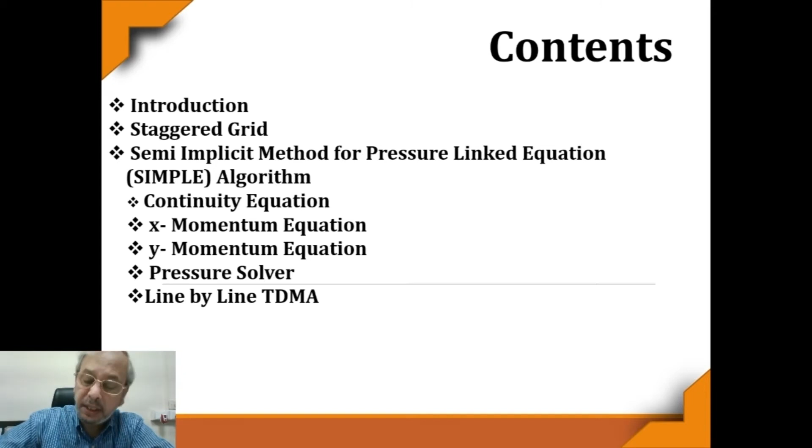Now, equations for incompressible three-dimensional flows are basically continuity equation and momentum equations. In the momentum equations, you can see we have written 1 by Re instead of nu, coefficient of viscosity. That means we have non-dimensionalized the equations. All the velocities and pressure are non-dimensionalized, and instead of nu, we get 1 by Reynolds number together with the viscous terms.

I will mention one feature that is common with both MAC and SIMPLE algorithms. Both the algorithms use staggered grid. Now, what is a staggered grid? Let me start with the basic definition of grid topology. A domain is divided into a number of cells. We can call them control volumes.

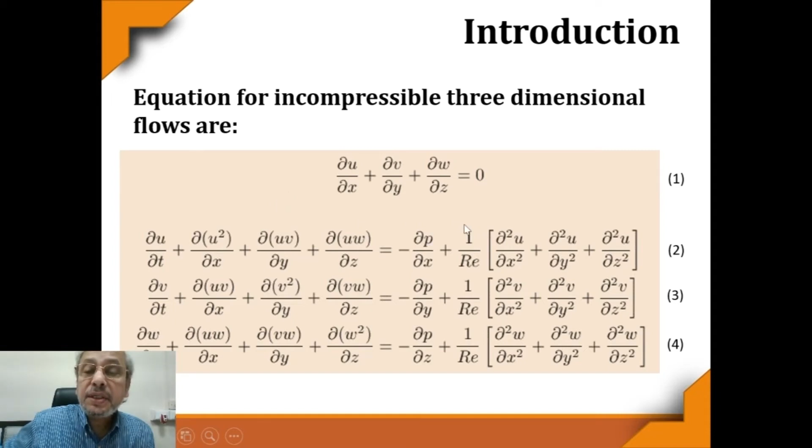In the case of compressible flow, we get an obvious expression for pressure that comes from the equation of state. But here, that obvious expression for pressure is absent. Instead, we have pressure gradients. So, we require to establish some relationship between the pressure gradient and the velocity.

As I said, if this is u(i,j) and this is p(i,j), then this point is p(i+1,j). Now, there is a pressure gradient between these 2 points, p(i+1,j) and p(i,j). This pressure gradient is directly responsible for this velocity u(i,j).

Similarly, in the y direction, if this pressure is pij, this pressure is pij plus 1. So there is a gradient between pij plus 1 and pij. And this gradient dp/dy is responsible for, or linked to, Vij. So pressure gradients in the respective directions are linked to the interfacial velocities. This gives a quicker convergence.

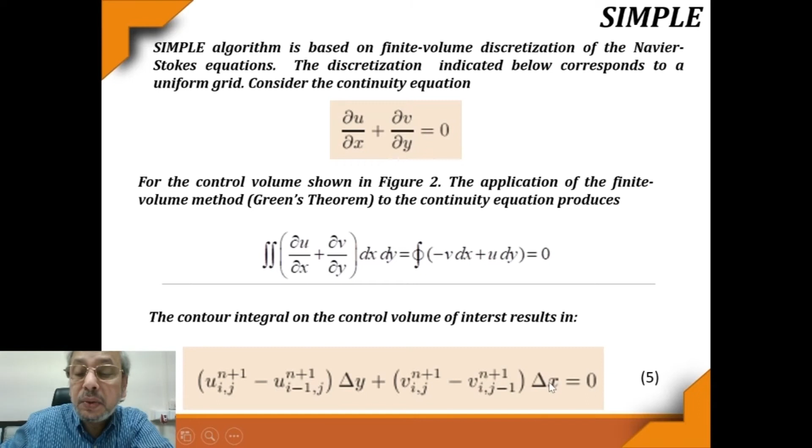So we are integrating over a cell volume or cell area, del u del x plus del v del y dx dy, an area integral, and we apply Green's theorem for evaluating such area integrals, which becomes the line integral of minus v dx plus u dy. And then if we perform the line integral, we will get uij minus ui minus 1j, both at the level of n plus 1, into delta y, plus vij minus vij minus 1, both at the level of n plus 1, into delta x equal to 0.

We can give a little deeper insight into how the integration has been done. This is the line integral over the cell of interest. Now you can see u dy. This dy is positive, uij into dy; for ui minus 1j, this dy is in the negative direction. So uij minus ui minus 1j into delta y, both at the level of n plus 1.

Minus v dx. Now vij is defined here, but when you do the cyclic integral, dx is in the negative direction. So vij into dx is in the negative direction. So minus vij dx, but that quantity has to be multiplied by minus, so it becomes plus Vij n plus 1.

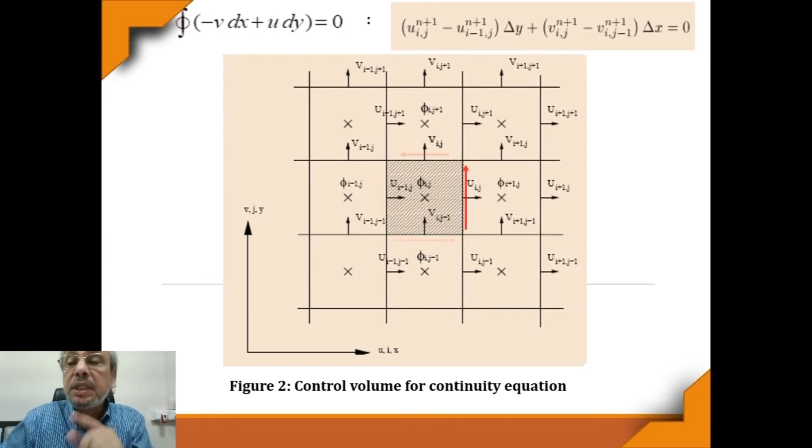Now we look at the x momentum equation. As usual, terms have been written: del u del t plus del x of u square plus del y of uv plus del p del x. Del p del x has been moved from the right hand side to the left hand side, sign changed, plus del p del x equal to 1 by Re (del 2 u del x2 plus del 2 u del y2). And we perform this integration.

Del u del t: this is called mass lumping. Over the control volume we do the integration through dx dy, and this is equivalent to, if you multiply by rho, which is 1 in non-dimensional form, mass by delta t, times uij n plus 1 minus uij at the level of n. So del u del t is taken care of.

Now this part of the integration we are doing the following way. We are writing it in strong conservative form. So we are moving the viscous term to the left hand side. So this becomes del x of u square minus 1 by Re del u del x. Similarly, del y of uv minus 1 by Re del u del y. And then we again perform the integration over the control volume, and del p del x is again integrated over dx dy.

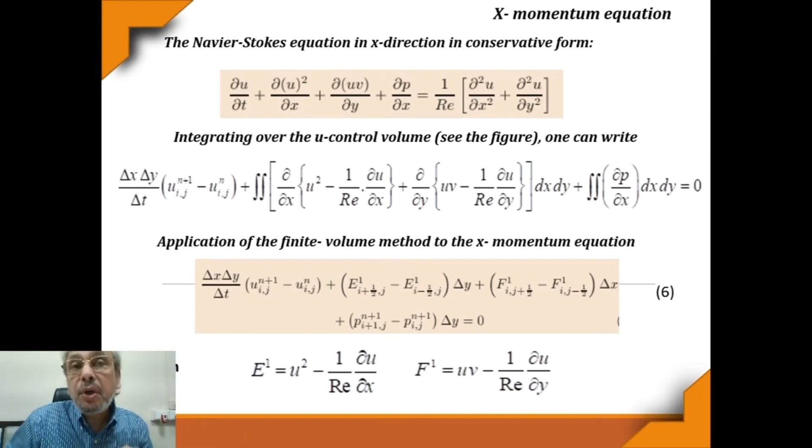Now, how this integration is performed: this integration is performed on the u control volume, or x momentum control volume. U control volume means in the main control volume pressure is at the center. If you recall, when we discussed staggered grid, we mentioned that u control volume means u is at the center.

So u is at the center, that means the immediate right neighbor is p i plus 1 j, the immediate left neighbor is p ij. And this is u i plus 1 j, this is u i minus 1 j. And we perform the integration on this. So as I was mentioning, this quantity E1, which is u square minus 1 by Re del u del x, is defined here and it is being integrated.

So E1, with respect to u ij, its location is i plus half j. So E1 i plus half j into delta y minus E1 i minus half j into delta y. And this, I told you, will be F i j plus half. But when we apply Green's theorem, basically this will be minus F1 into dx.

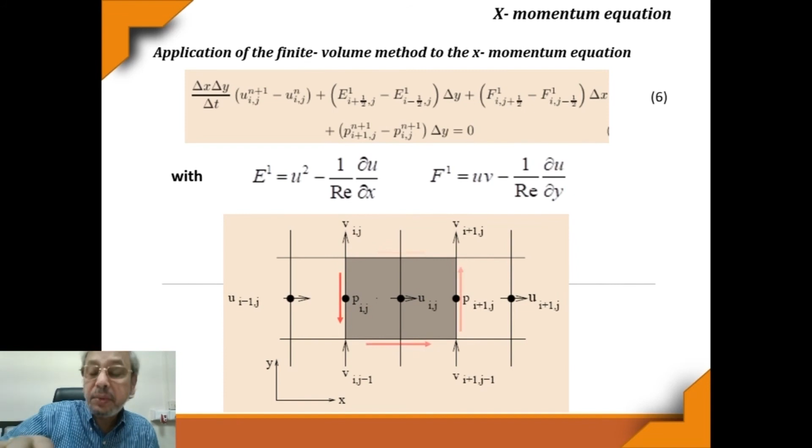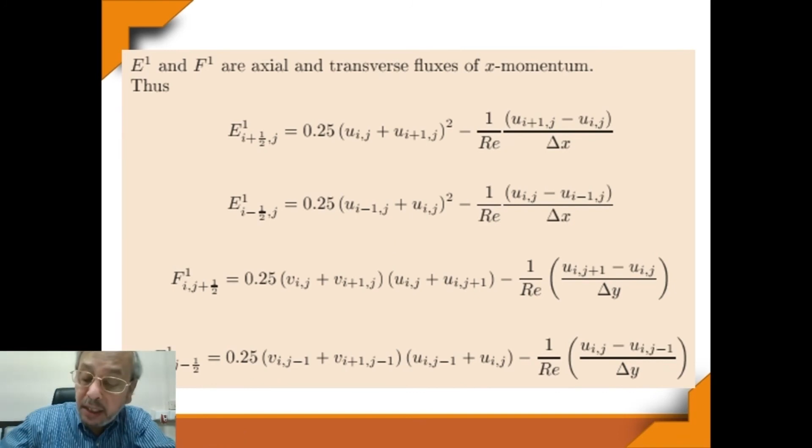So what we did, if you look at it a little systematically, this is the integrated x momentum equation. How we got the integration, we have explained, and then we have linearized it. Then we have written the specific expression for E1 i plus half j, E1 i minus half j, F1 i j plus half, F1 i j minus half in terms of the u values and v values at the neighboring cells. Then we are linearizing it, and then we write the entire x momentum equation.

So you can see that if we expand, write term by term, this entire group of terms is basically associated with uij n plus 1, and these are basically grid dimensions, Reynolds number, and u and v values at nth level which are known, with uij at n plus 1.

So if uij at n plus 1 is the point of interest, instead of ij we can call it p. Then this is basically the eastern neighbor, i plus 1j at the level n plus 1, and this is basically the coefficient of u i plus 1j, and these are also known values, either values of u's or v's at nth level or grid dimensions, geometrical dimensions. Then the western neighbor ui minus 1j at n plus 1. Again, the coefficient is known. These are u or v values at nth level, and grid dimensions.

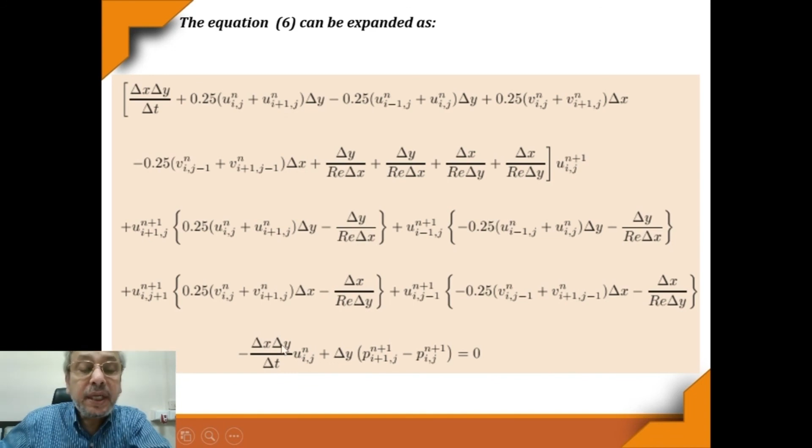This b_u term we will again have a look at. This is uij at the level n multiplied by this. This came from temporal discretization, and so b_u equals minus delta x delta y uij at the level n divided by delta t. So this is b_u, and a_nb u and b_u in equation 7 can clearly be seen from the previous slide. So this slide gives the meaning of all the individual terms in this compact form. So this is equation 7, the final form of the discretized x momentum equation.

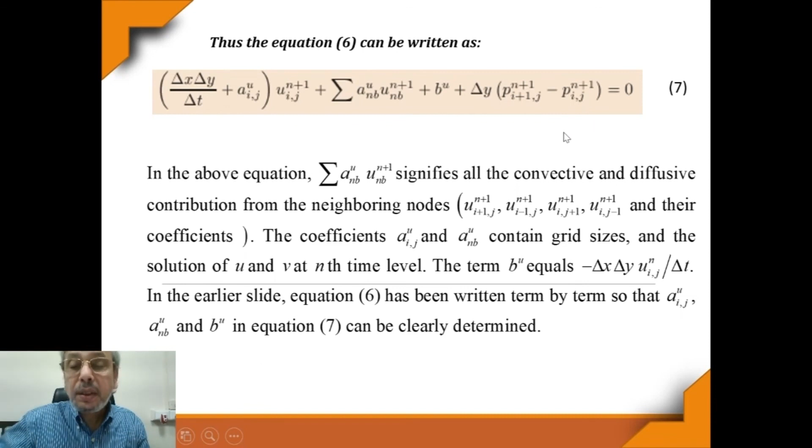Again, we have rewritten uij at the level n plus 1 with all neighbors of uij, eastern, western, northern and southern neighbors at the n plus 1 time level, b_u plus delta y into pressure gradient. This is equation 7, found through integration of the x momentum equation on this control volume defined by dx into dy. This is the u control volume on which we integrated the x momentum equation to get equation 7. We have already got the integrated continuity equation, which was equation 5, and this is equation 7, the integrated x momentum equation.

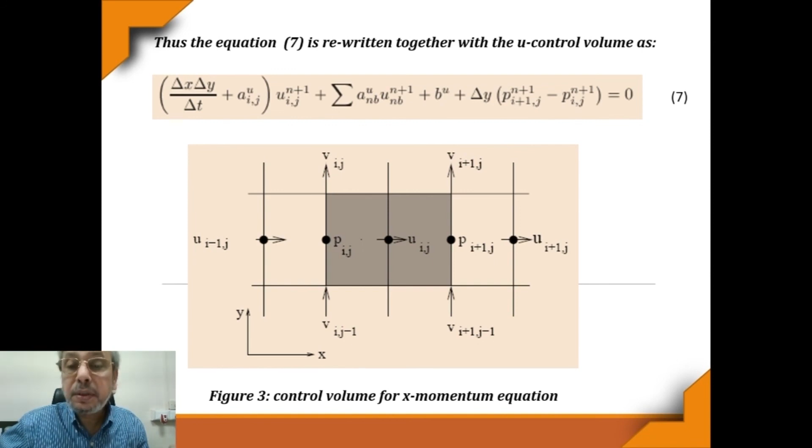We will stop here today, and the remaining part of the lecture we will cover next day, and we will work with the y momentum equation, pressure solver, and the algorithm.